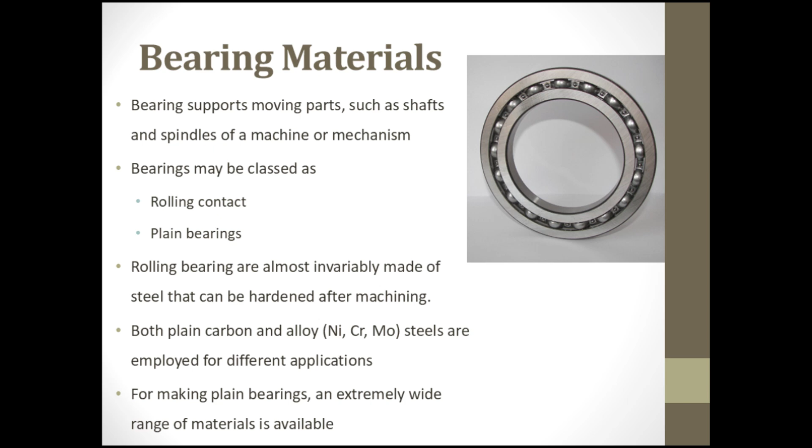Bearing materials. A bearing supports moving parts such as shafts and spindles of a machine or mechanism. Bearings may be classed as rolling contact or plain bearings. Rolling bearings are almost invariably made of steel that can be hardened after machining. Both plain carbon and alloy, namely nickel, chromium, molybdenum steels, are employed for different applications. For making plain bearings, an extremely wide range of materials is available.

Bearing materials. A bearing material should have the following properties: possess low coefficient of friction, provide hard wear resistant surface with a tough core, have high compressive strength, have high fatigue strength, be able to bear shocks and vibrations, possess high thermal conductivity to dissipate heat generated due to friction between the bearing and the rotating shaft, possess adequate plasticity under bearing load, be such that it can be easily fabricated, possess resistance to corrosion.

Bearing material should be softer than the shaft material, possess anti-seizure characteristics, possess ability to embed in itself any dirt, etc. present in lubricating oil, should be cheap and easily available, etc.

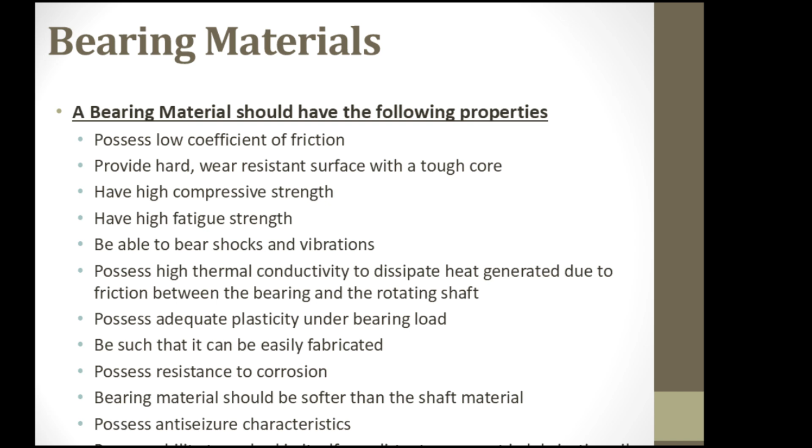Bearing materials types: lead or tin based alloys, white bearing; cadmium based alloys, aluminum based alloys, silver based alloys, copper based alloys, sintered bearing materials, non-metallic bearing materials, or plastic bearing material. Selection of a particular bearing material depends upon types of loading, running speed, and service condition.

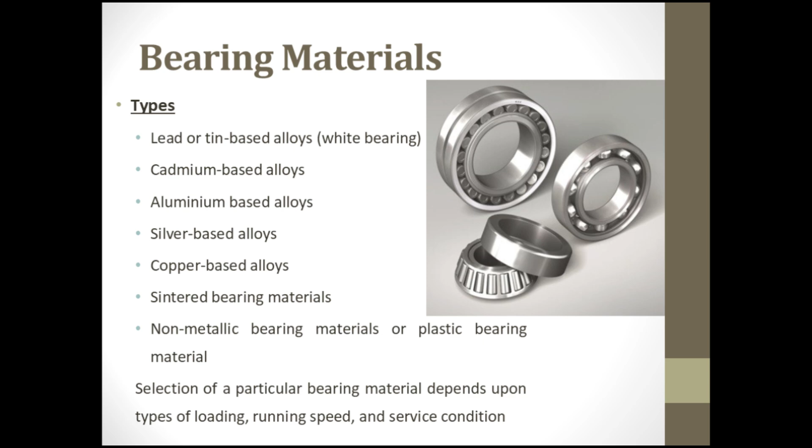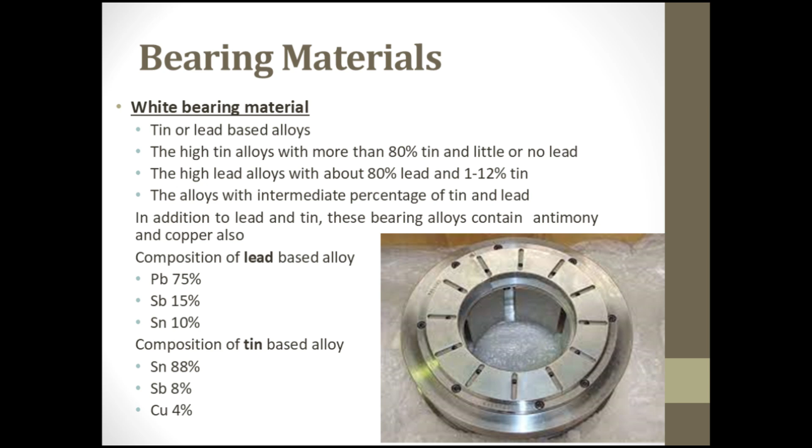Bearing materials: white bearing material, tin or lead based alloys. The high tin alloys with more than 80% tin and little or no lead. The high lead alloys with 80% lead and 1 to 12% tin. The alloys with intermediate percentage of tin and lead. In addition to lead and tin, these bearing alloys contain antimony and copper also. Composition of lead based alloy: lead 75%, antimony 15%, tin 10%. Composition of tin based alloy: tin 88%, antimony 8%, copper 4%.

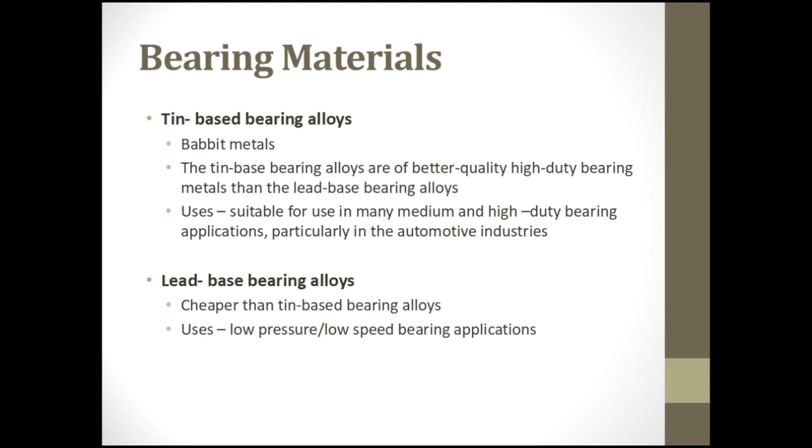Bearing materials: tin based bearing alloys, Babbitt metals. The tin based bearing alloys are of better quality high duty bearing metals than the lead based bearing alloys. Uses: suitable for use in many medium and high duty bearing applications, particularly in the automotive industries. Lead based bearing alloys are cheaper than tin based bearing alloys. Uses: low pressure, low speed bearing applications.

Bearing materials: cadmium based alloys. Composition: cadmium 98%, nickel 2%, silver 1%, copper 1.5%, zinc 0.75%. They have a structure consisting of a soft matrix containing harder crystals of intermetallic compounds. Not very popular because of high price of cadmium. These bearing alloys possess greater compressive strength than tin based alloy. Cadmium based alloys possess low coefficient of friction, high fatigue strength, high load carrying capacity, low wear, good seizure resistance, fair ability to embed dirt, poor corrosion resistance.

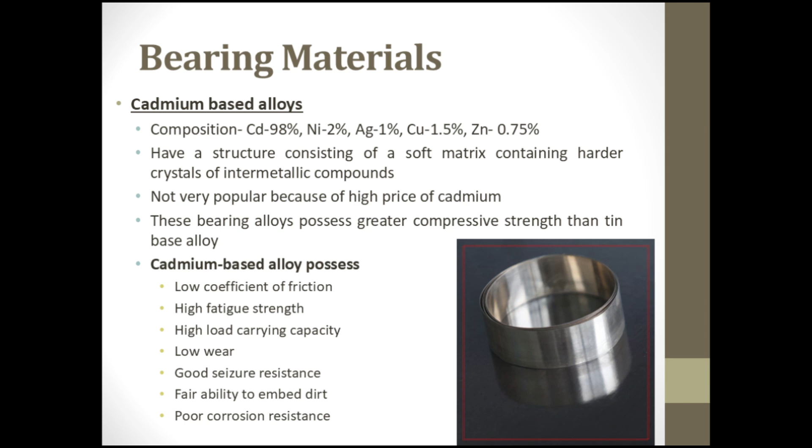Bearing materials: aluminum based alloys. Composition: aluminum 92%, tin 6.5%, copper 1%, nickel 1%, silicon 2.5%. These are two-phase alloys for use in bulk form or as linings on a steel base. Aluminum base alloys possess excellent corrosion resistance, fair conformability to journal, good ability to embed dirt, good seizure resistance, good thermal conductivity, high coefficient of expansion. These alloys find applications as bearings.

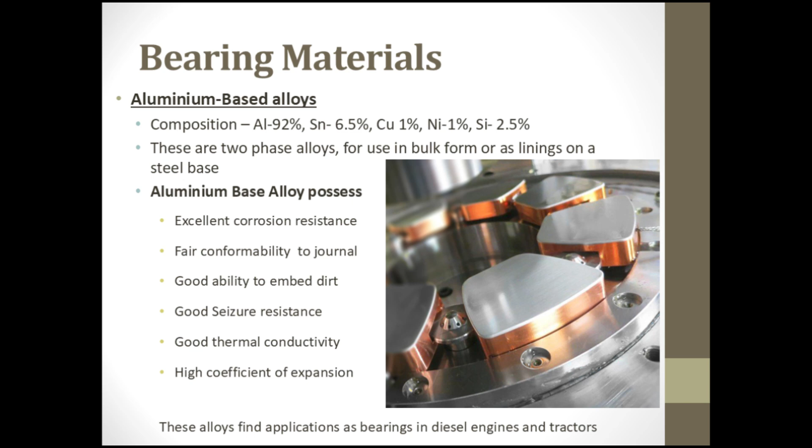Bearing materials. Copper based alloys. The term bronze covers a large number of copper alloys with varying percentage of tin, zinc and lead. Bronze is one of the oldest known bearing materials. Bronze is easily worked, it has good corrosion resistance and is reasonably hard. Composition: copper 80%, tin 10%, lead 10%. Tin bronze, 10 to 14% tin, remainder copper, is used in the machine and engine industry for bearing bushes made from thin walled drawn tube. Copper based alloys are employed for making bearings required to resist heavier pressures such as in railways.